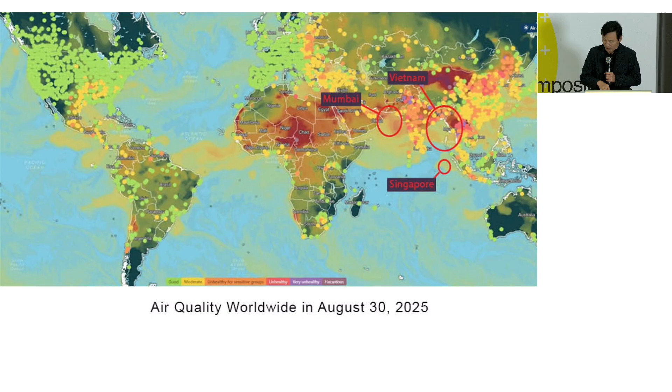I now live about 40% of my time in Silicon Valley, which has maybe the best weather. When we come back to the humid situation, the humid and polluted air is really hard to live in. And because there are so many people, traffic jams become a very crazy situation now in Hanoi and Ho Chi Minh City.

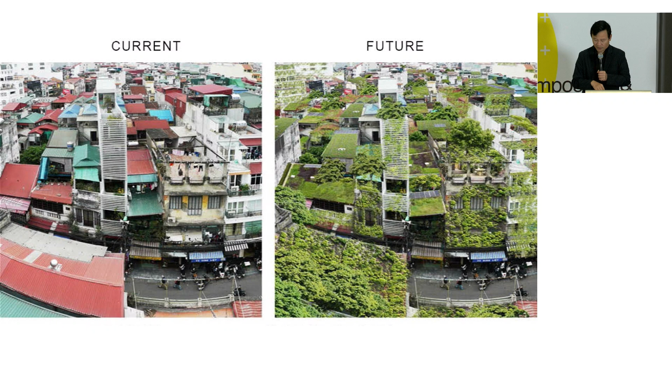Our aim is to change the current situation—whether we build new buildings or renovate them, we have to think of solutions for how to live, not only putting green on the building but doing passive design one by one. We also do a lot of master plans combining agriculture, recycling water, solar panels, and ventilation.

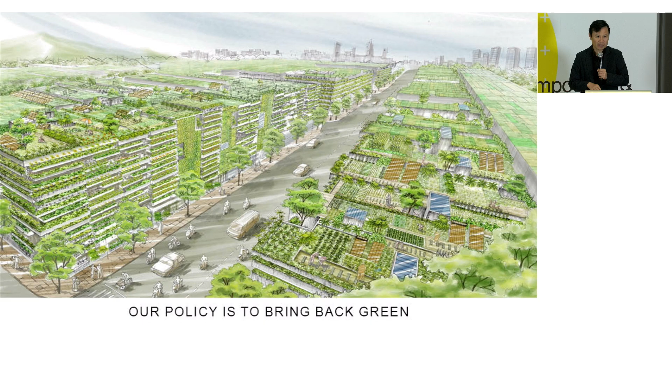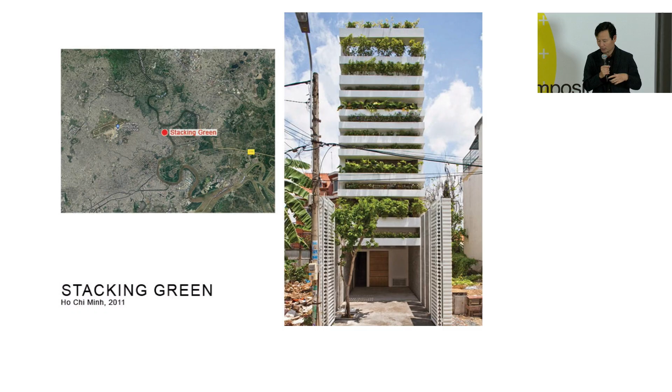Let me explain each project. I came back in 2006, and at the beginning there wasn't a lot of work for me to do. I started with many bamboo projects, but this was almost the first concrete project I did—it's really narrow, only 4 meters wide and 20 meters deep. The house is a typical house in Vietnam. I started designing this house for free, and gradually I got more projects.

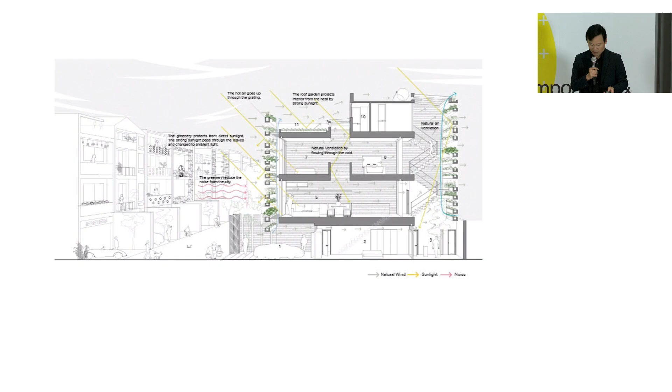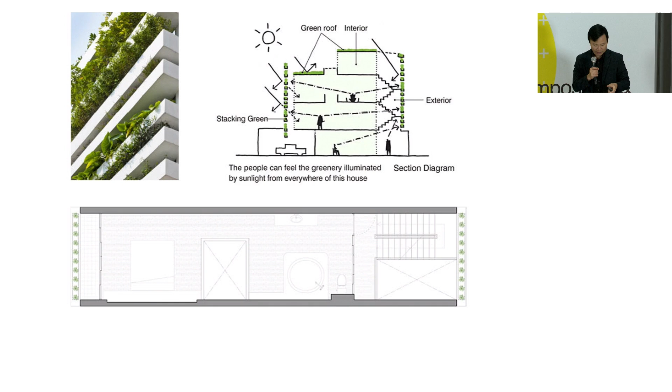Because of the polluted city, we tried to cover it with green and introduce sunlight and ventilation into the space. Now it's become a building with a green roof, green facade, and green backyards—we introduce light and wind into the space. In a tropical country, I think the double skin should not be glass and glass, but green and glass. I think it helps better.

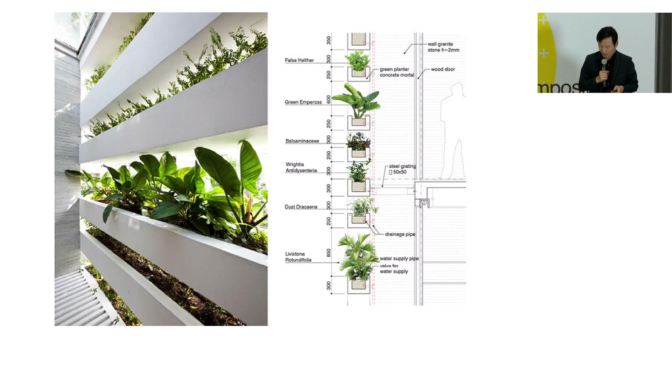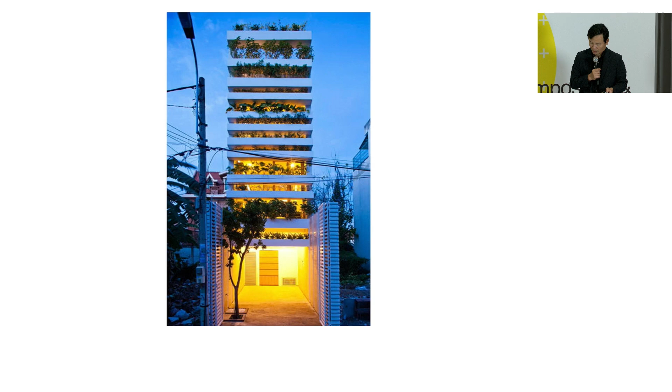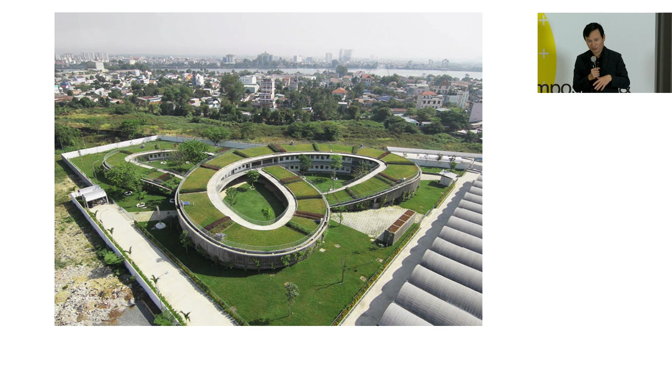This next project—we won the competition, but in reality, at that moment in Vietnam it was hard to convince them to build this kind of project. We submitted another project and won the competition, and at the last moment we told them how about this one. I think if we had shown this at the beginning, they would have rejected it. This is a kindergarten for factory workers, for the Pouchen Group.

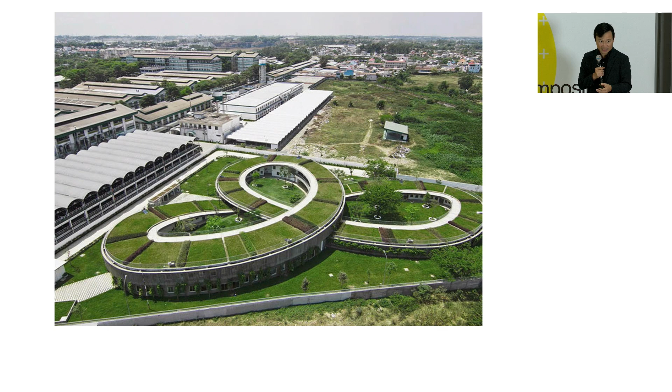There are about 23,000 women working at the shoe factories, so their children can come here to learn. Because of the low budget, we tried—of course the building isn't...

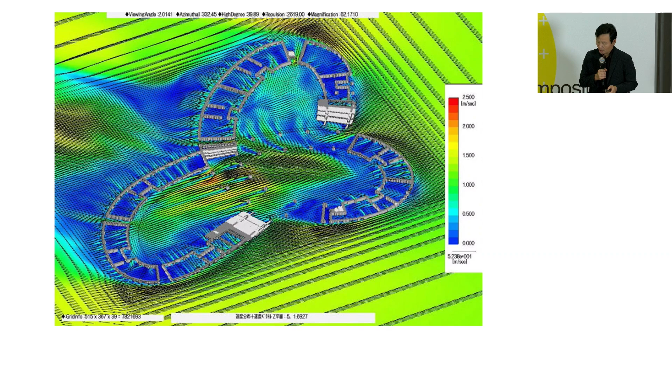We didn't have the budget for air conditioning, so we used a green facade for farming and also ventilation, using water there for a farming system on the rooftop. Their parents can come and plant vegetables for the children to enjoy, because with the worker's salary it's hard for them to afford more vegetables—this way it helps them have more, and the children can enjoy the process of agriculture. This contains some courtyards connected together.

Due to the limitation of space, we maximized the space into the roof and back to the courtyards again. We try to do each project like a small park for the city, and if we do so, other Vietnamese architects also try to do the same thing. Then gradually the city becomes better.

This is a project we designed for a depressed client. Her husband has severe depression, so we designed the house to be the hardest to live in, because we designed each box independently. If he wants to go to the restroom, he has to go out, because some depressed people tend to stay in the room without going out. But you need to go out for restroom, for food, for everything.

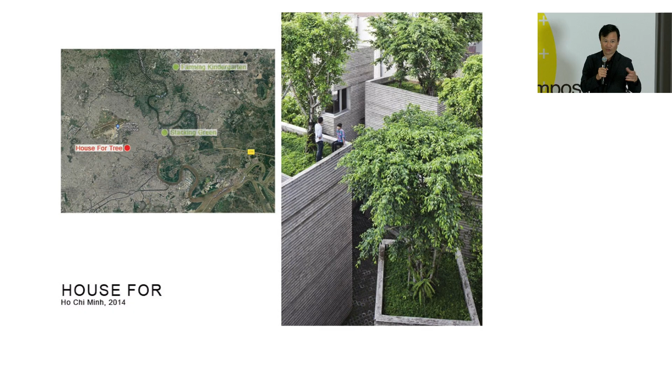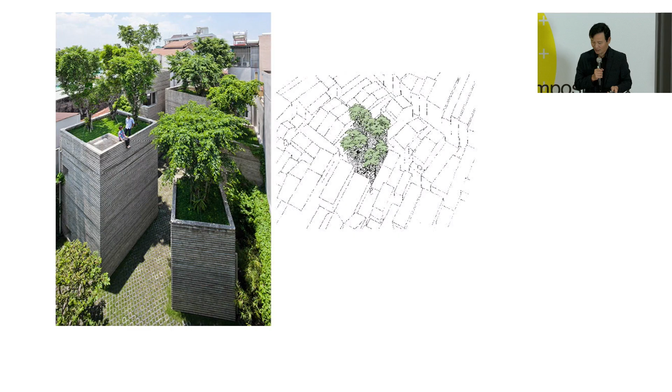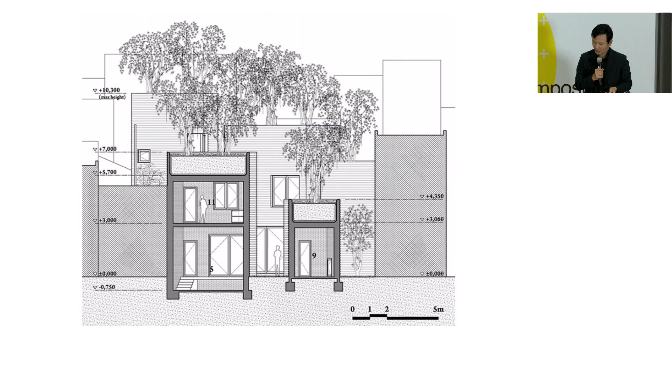But it helped them well, because in the middle of the concrete jungle, suddenly we have a pot with a tree. This is bamboo formwork concrete. From outside it looks like a concrete box, but inside it's open, and the ficus tree is growing fast to cover the garden. We have many courtyards in the middle of the house, and then it opens up here.

Another one is also, I think, specific to our context in Asia versus America, because the size of the building is too small - in Vietnam it's usually less than 100 square meters. This house is pretty big, about 200 square meters, and we designed it with many gardens at many levels, so it has connections from everywhere.

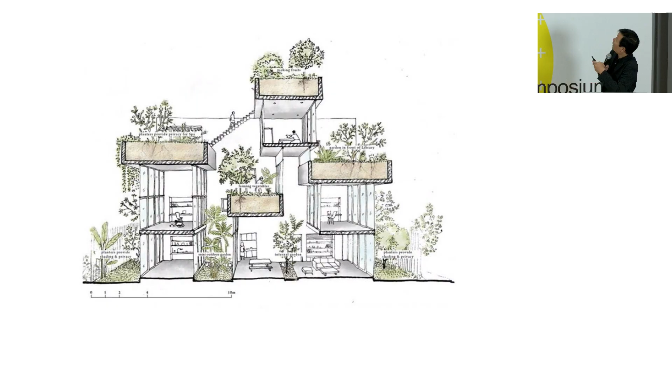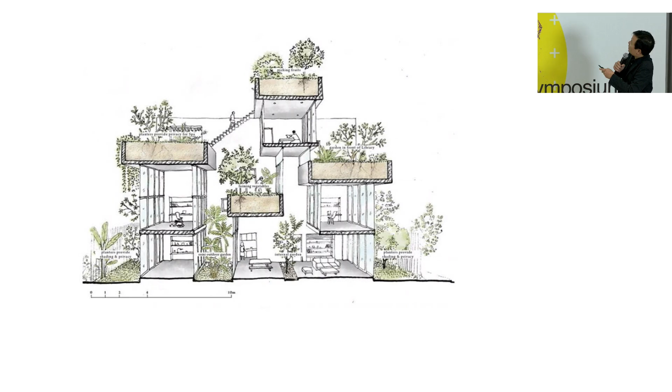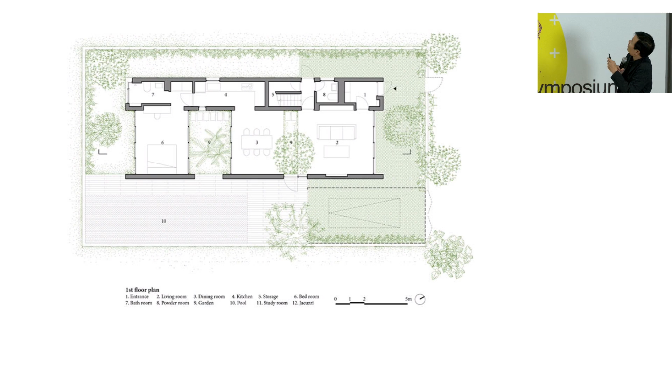There are two sons in this home, but they are addicted to gaming. That's why we designed the house to be connecting everywhere, so you can see through - if you look, you can see many levels of the garden, many levels of trees, and the wind flowing through. The plan is really simple: we put everything here, and the space connects through the garden.

Another project is a hotel in Da Nang. In the middle of the concrete jungle, we try to put some greenery. In the same way, it's only 700 square meters, but they required about 153 rooms for the hotel - a lot. So we tried to do something simple and easy, but with some differences from other buildings.

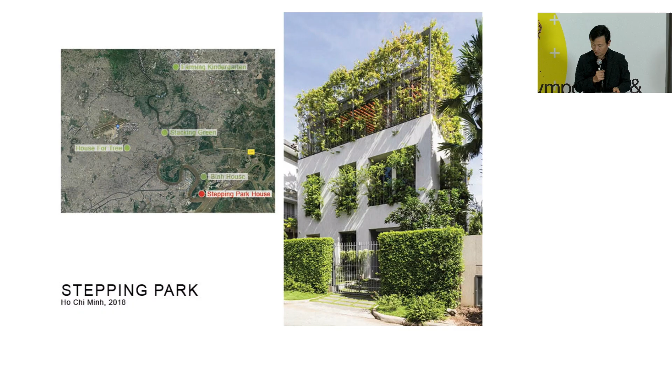This project is the house next to the park. We try to introduce the park into the house like this one, and continue the garden from the park into the house and up.

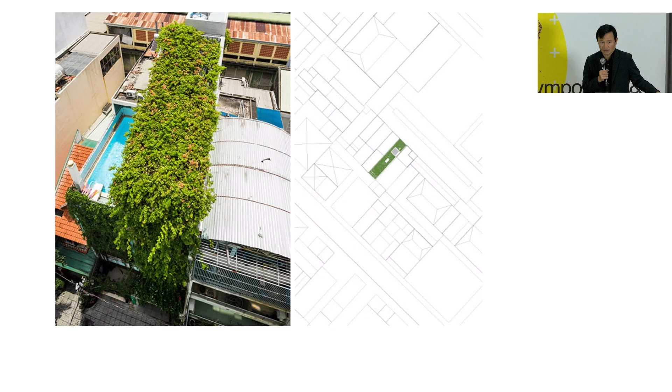Another really small house is less than 4 meters wide, but we cover it with a green tree system. This works quite well because there are many small courtyards in the middle of the house, which creates different air pressure and generates wind inside. I like this wind system.

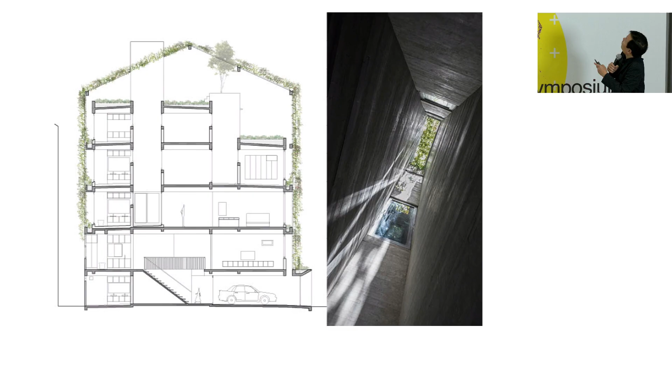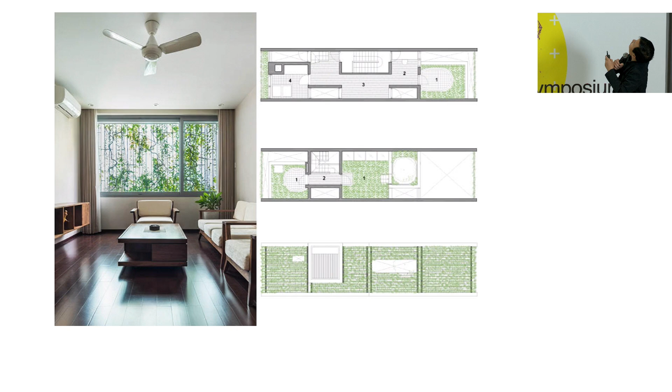Here you can see the small courtyards in the middle of the house, which we cover. There's also a gap here that introduces light and makes a difference. You can see the courtyard, and covering it makes living very well with the hot sunlight in Southeast Asia.

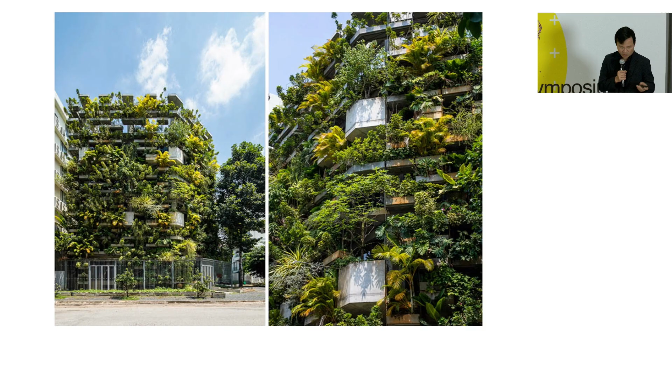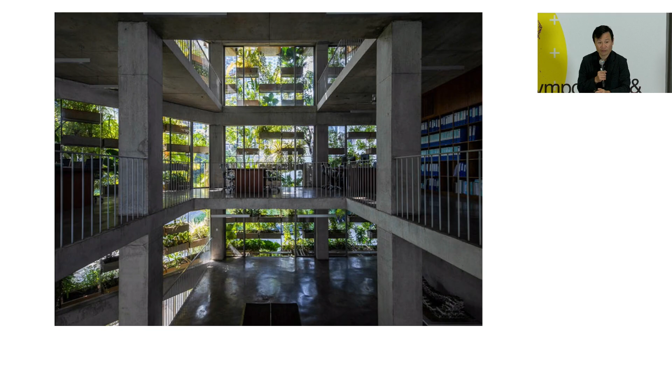This is my office in Ho Chi Minh City. Since we are architects, we try to save costs for our building. We just built a concrete frame and made a hanging system outside. We installed very simple glass, hid the frame above and below the floor, and even poured the concrete floor hard so it would be easy to finish, with no additional finishing needed.

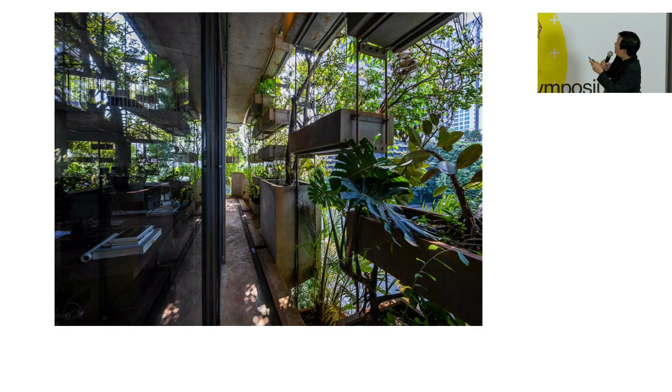You can see the hanging system outside. The big post becomes a beam to hang the next section, and here's another big post, and then we hang it down this way, separate from the building. So we just built the concrete frame and hung the greenery system outside.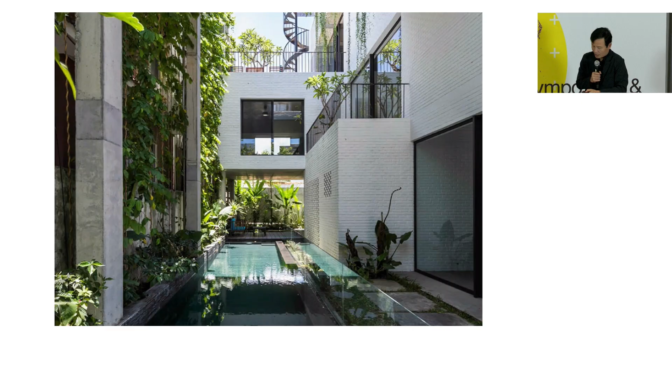This one is another house in Da Nang. Again, we try to introduce nature into the house, with a void here and a huge tree pot, introducing light through the tree.

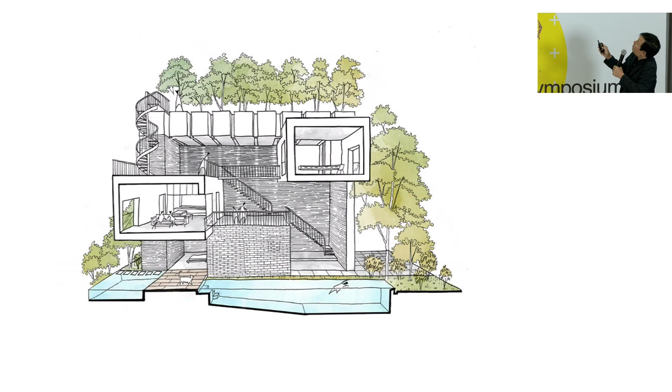This box pops out from there, and we introduce a pool and fish here. Water pumps up here for watering, then goes back down with the fish, creating a very good cooling and ecological system for the house.

You can see the box pop out from there, and then this space, and the pool under the boxes, and the connecting horizontally and vertically for the house. Each you can see the open space from inside and outside, the light into, and then the combination of material.

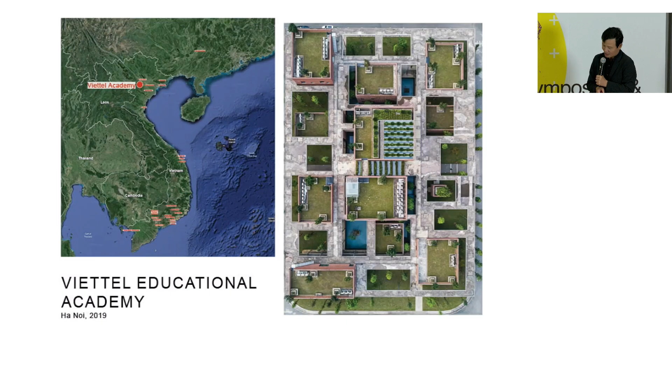So when I go to the US, I realize we cannot do some building like this in a country with high labor costs. It's super expensive.

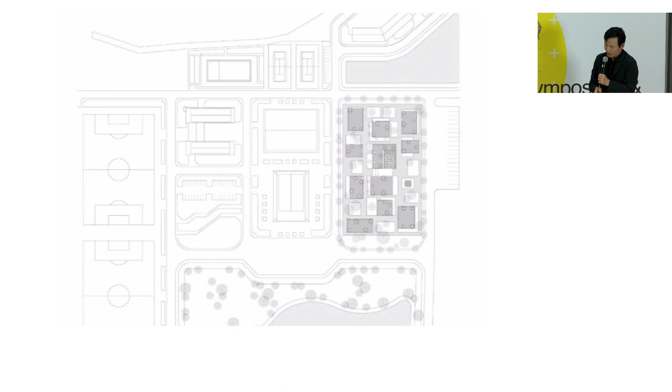So what we do in another project in northern Vietnam, which is a very hot and humid area, is put the box in the middle of the big tree, because we plant some type of tree that can grow big, and connect it by concrete slab. The concept is quite simple, and since it's super hot, we try to make the facade like the shadow for the surface itself, and also the shadow from the tree, the concrete slab, and the water pond in the middle of the building to make a cooling system.

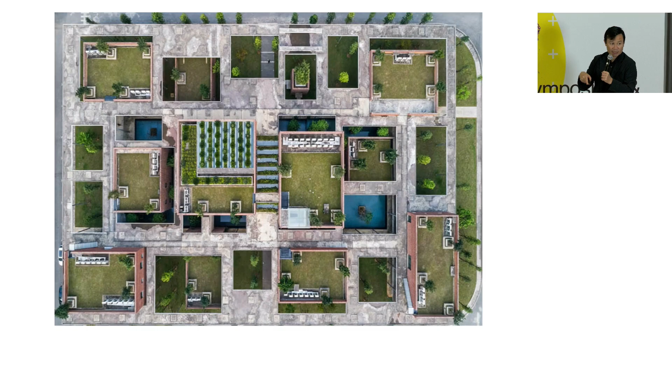You can see the surface of the building gives a little good shade for the walls themselves. And another house in northern Vietnam, too.

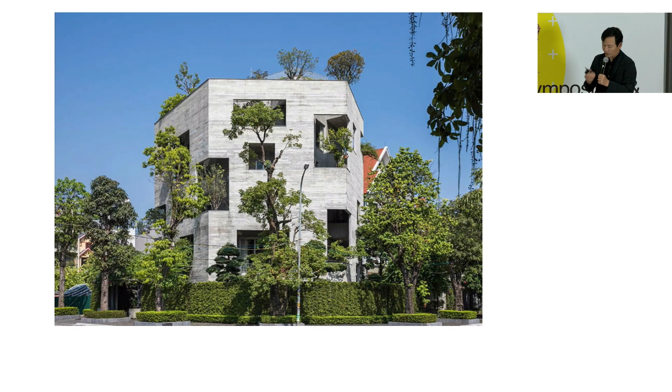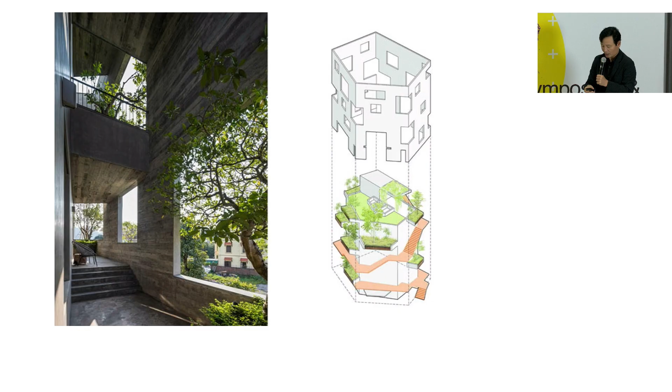This system is for a pretty bigger area, so we try to make the circle for the double skin outside, the concrete wall, and the middle air space, and inside space, with greenery outside. We frame the landscape around by the concrete, and also introduce greenery to the middle space, and the space inside the bathroom.

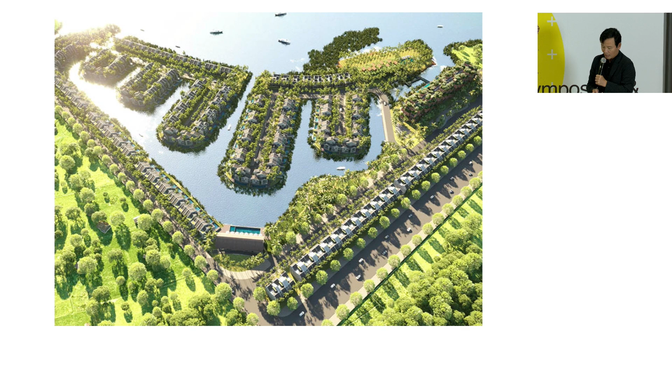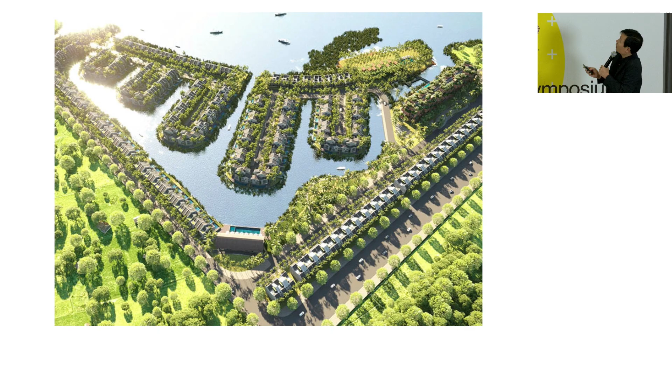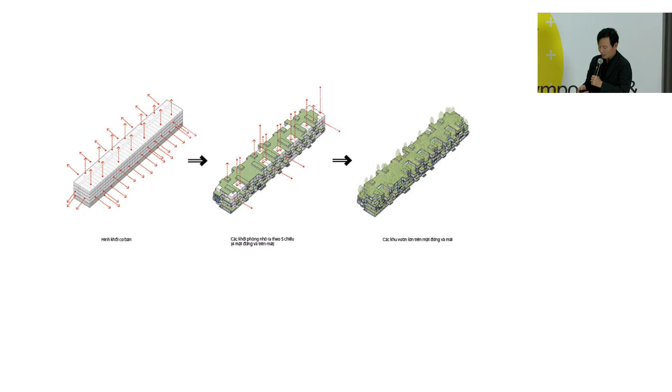Another project is a hotel. We do the master plan here in Hoi An, and they run the business quite well. It all sold out, and then we convinced them, let us do something different - there is a five-star hotel there.

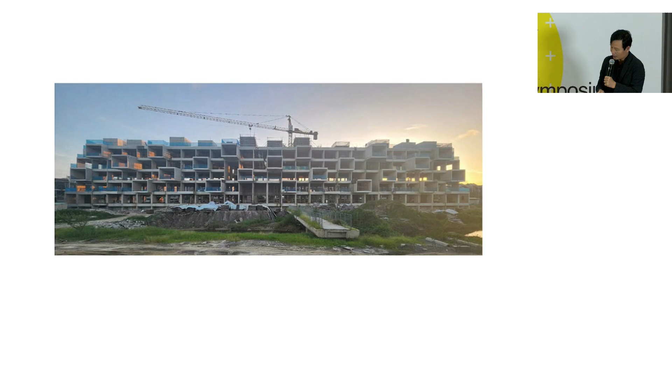The owner itself is a construction company, and they've built a lot of bridges in Vietnam. We tried to convince them to do a concrete building like this, taking Hoi An's moving roof landscape as the DNA to put into the building, making it not a moving roof but a moving box. It's going to be done soon.

This is the entrance space with bamboo formwork concrete, the room, and now they're doing the bamboo formwork concrete for the entrance.

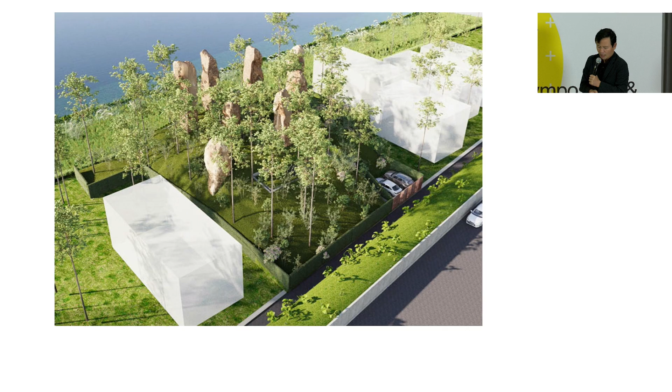Another house is after COVID - we think much about this, in Singapore, maybe everywhere we use air conditioners, but what I really don't like, because I used to live in the forest for about 3 years to meditate in Myanmar, almost living in nature, even hot, even cold.

So we designed this house with a wind tower to catch the wind, and each room has its own - for example, this room has the wind tower and the courtyards behind, and the wind comes from here.

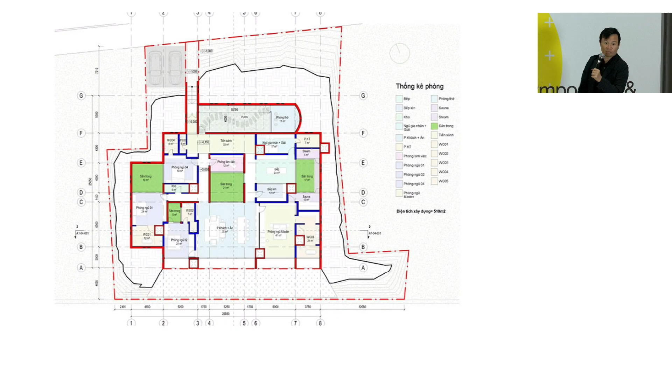Here is really negative pressure compared to this plus pressure, so it automatically makes the wind go down to the back areas. That's why we design many small courtyards for each room.

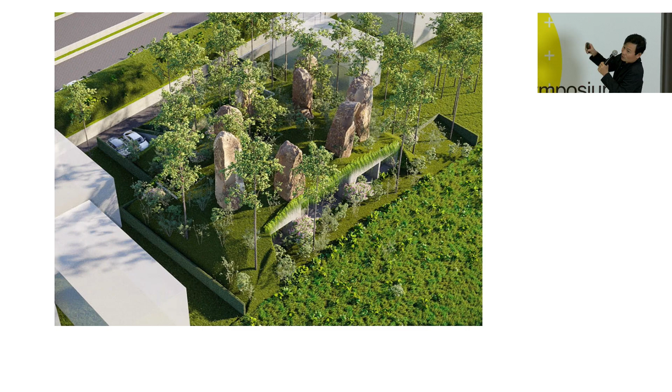Back again, you can take a look - this one catches the air and then goes down to the courtyards behind. So it always has an air pressure gap in the room, and that's why it catches the wind too.

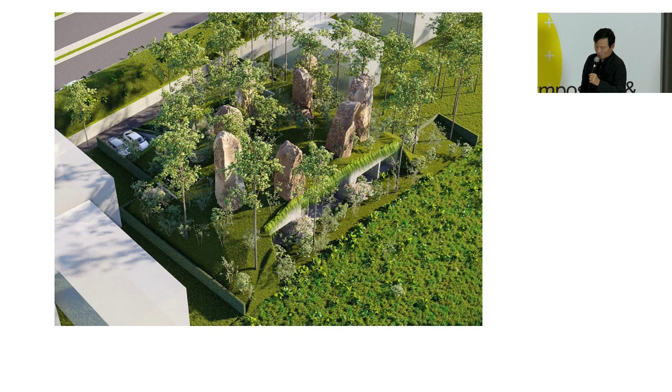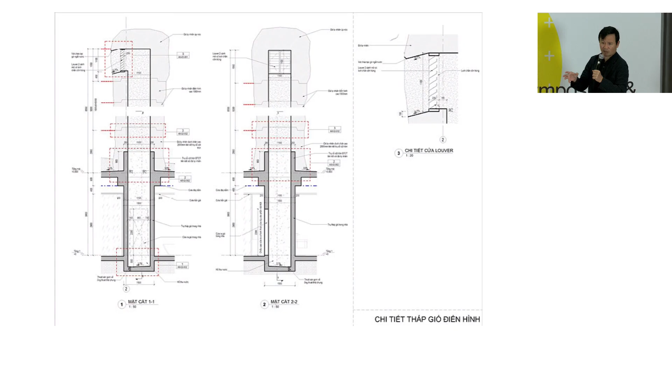This client does machinery - they have a lot of good machines to dig the stone to make the real stone tower for the wind catcher.

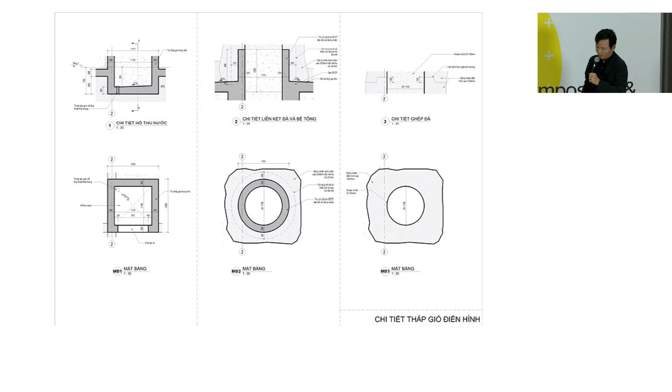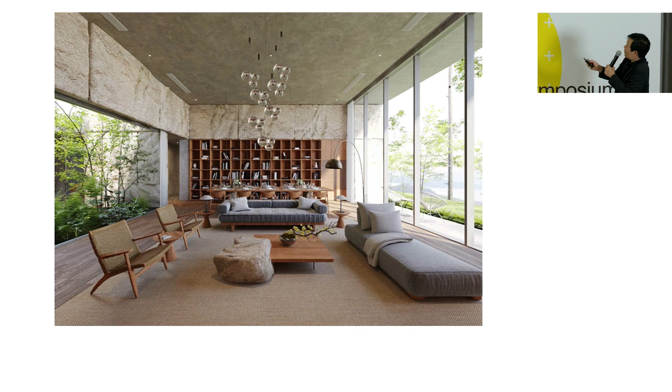This space for us, here the wind tower catches the wind and hits the backyard, creating negative pressure. That's why it helps.

And then the meditation room, the bathroom here - the wind comes and back.

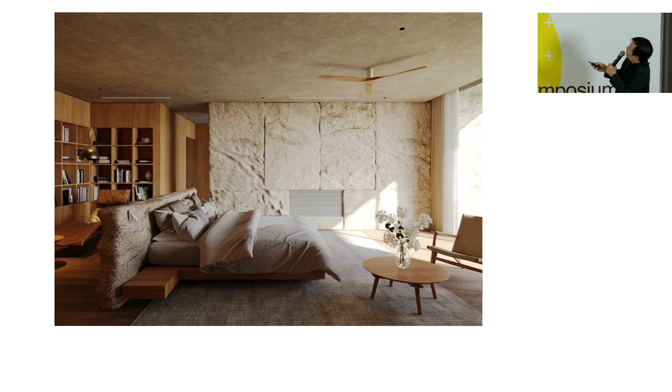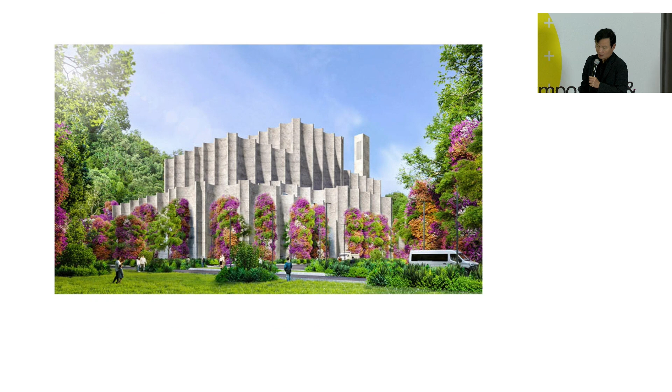Another factory is the waste to energy plant, burning garbage to make electricity. This is now under construction, and the owner has a concrete company, so they manufacture many concrete parts to sell.

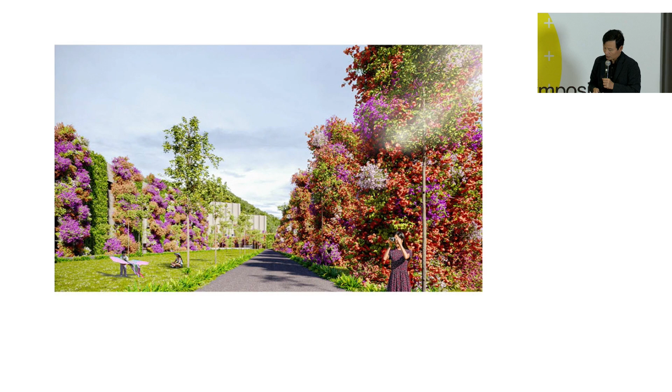That's why we try to design it by using the surface itself as the part, and then just put it on to be a building. And you can see the bougainvillea is a very easy flower to grow.

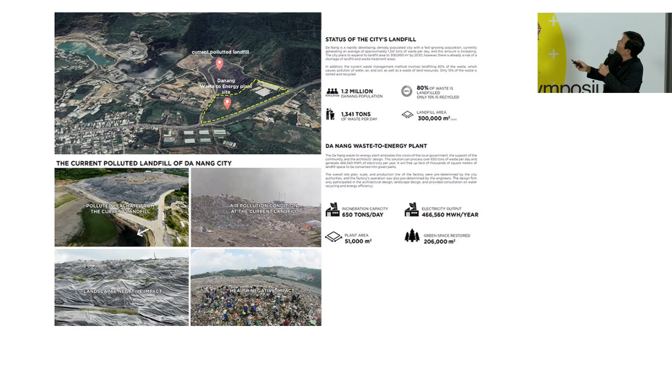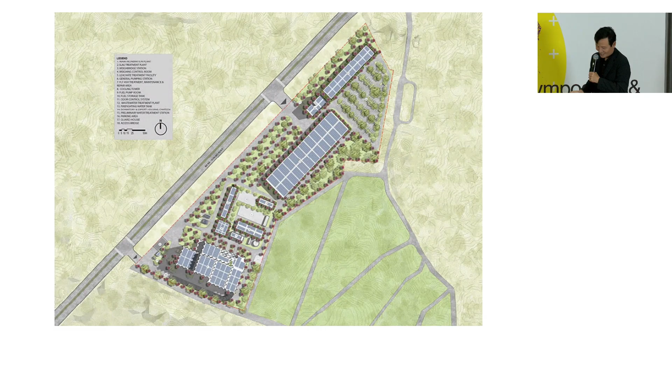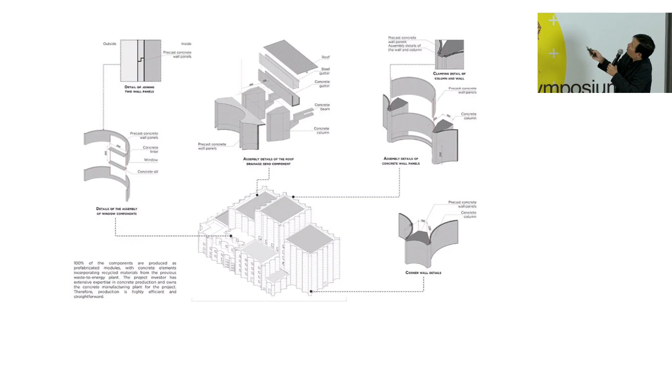So, what is it? Okay, let me go through a little bit faster. The concrete part is like this: we design a column, and then we design each part for manufacturing and put it on the column. We make the cover of the building easily by the parts we put on. Let me explain that later.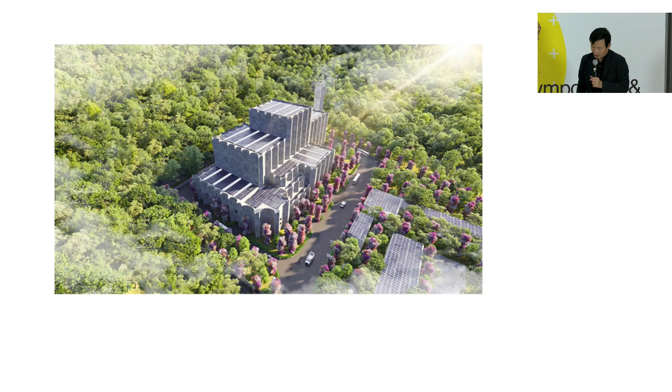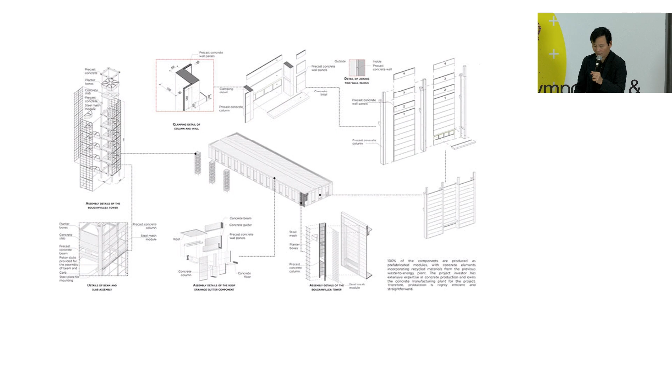We have the building like this, and the roof is a normal steel roof with solar panels on it. And we introduce the pure bamboo project. This is the first pure bamboo structure.

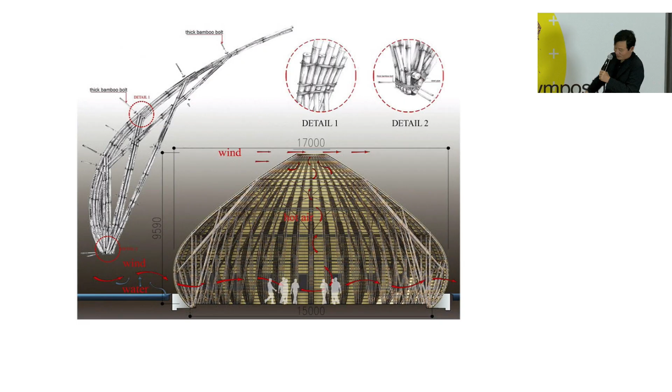So I work with the worker, and then we make the first frame. It takes about a few days, and then we copy them for many. Finally, we reuse all the other parts of bamboo to make the furniture, and then the space inside looks like this.

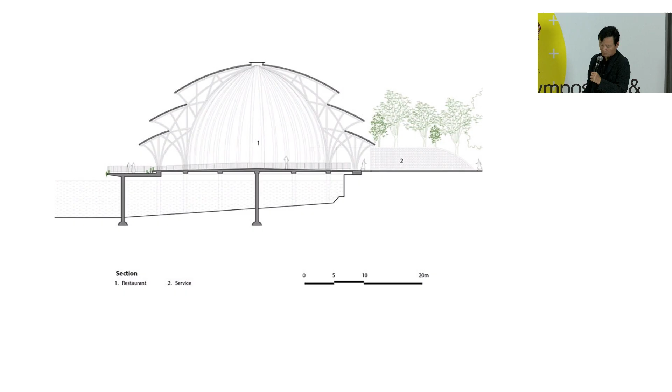So we fix this by wire. This one is in northern Vietnam too, about more than 1,000 square meters. This dome is about more than 15 meters high. So the space inside is made by bamboo, and each frame is like this.

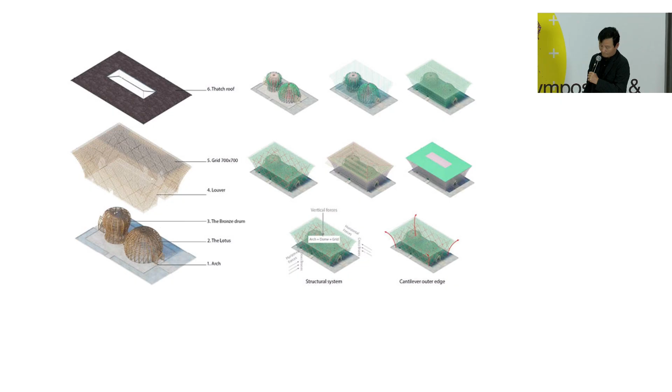Another one is a welcome center in southern Vietnam, and then we make two domes filled with different functions inside, like a core and a grid system outside, with a brace in the middle of the grid system.

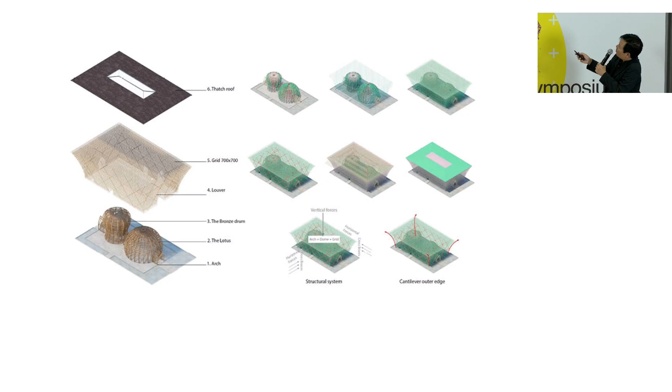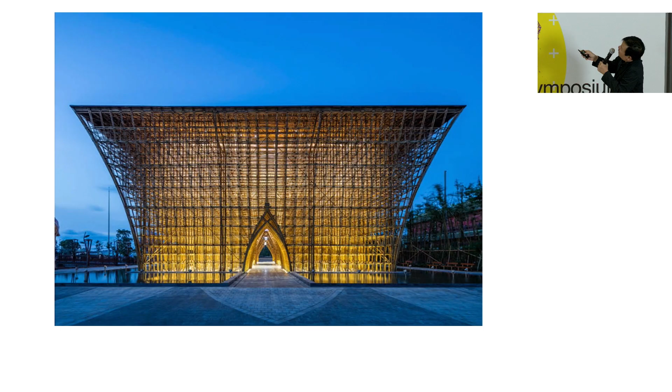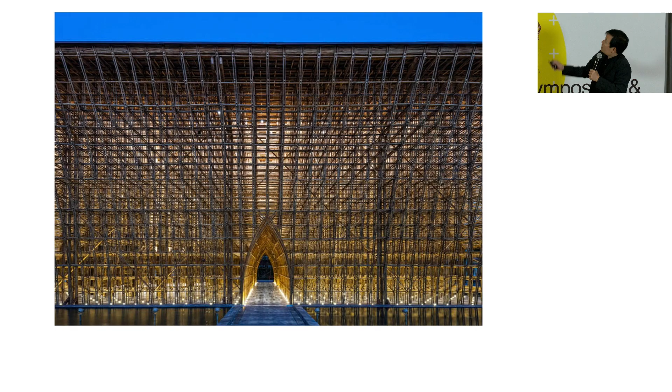Because it cantilevers out, we need a hanging system, and this is very complicated, the detail for the structure. You can see here the brace going through, and here it's falling down, and we had the hanging system at the top to make the structure work this way. You can see some braces through the building, and when you go inside, you feel the light, the wind, the breeze, air around.

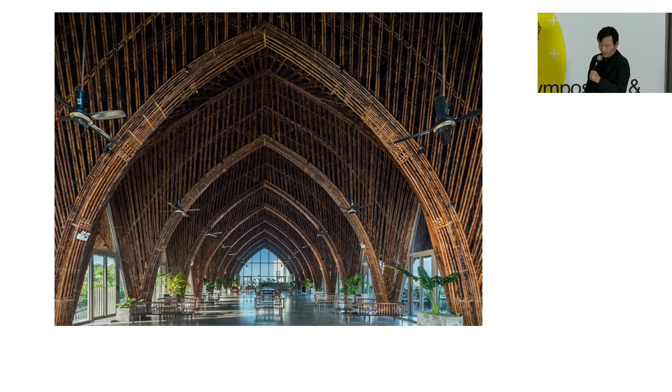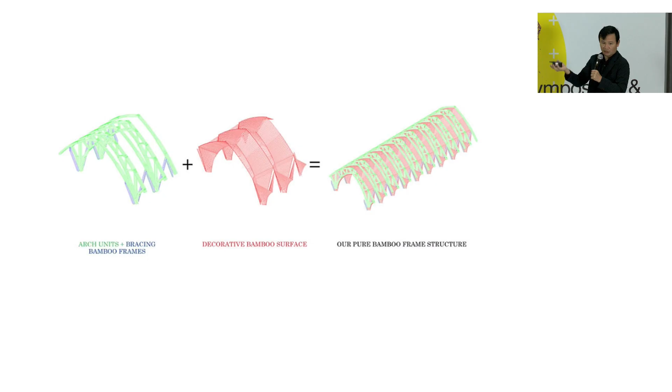Here's another dome, another bamboo structure for the community house in the middle of Vietnam. The unit system here is not just a decorative bamboo surface, but it supports the horizontal structure system, like this way.

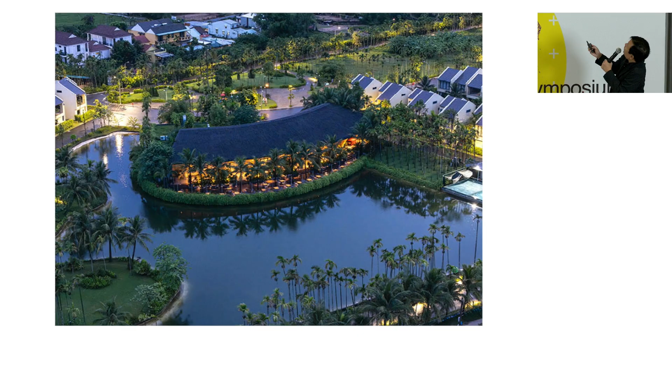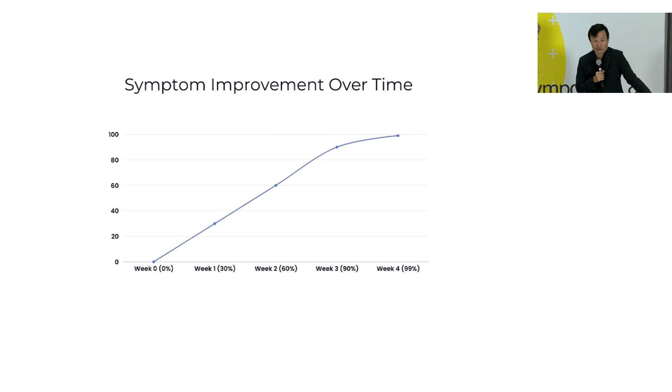So, should we do it together for about 5 minutes? So then we do it together. Sit straight, please. Sit. Close your eyes.

Can you feel your bottom touch the chair? Can you feel your back touch the chair right now? How about your left leg touching the floor - feel it? Right leg, can you feel it? Left hand - can you move your left hand to feel it?

Right hand. Back - can you feel your back right now? Left leg. Right leg. You feel your head? If you cannot feel it, you can touch your hand to your head. Can you please put your hand to your head, please?